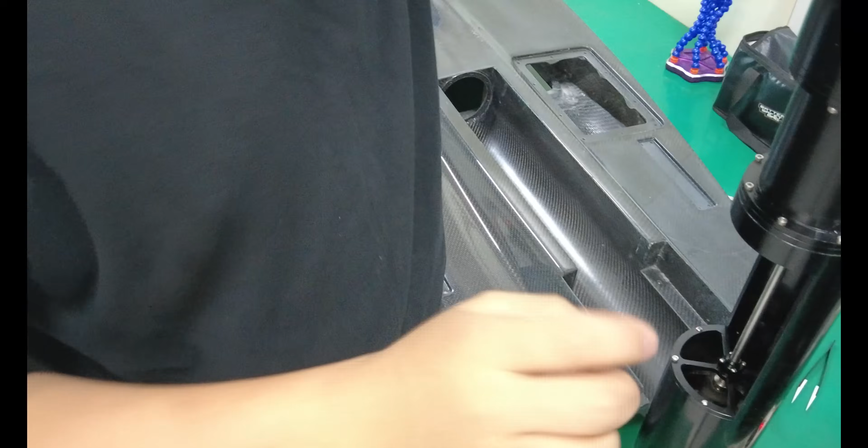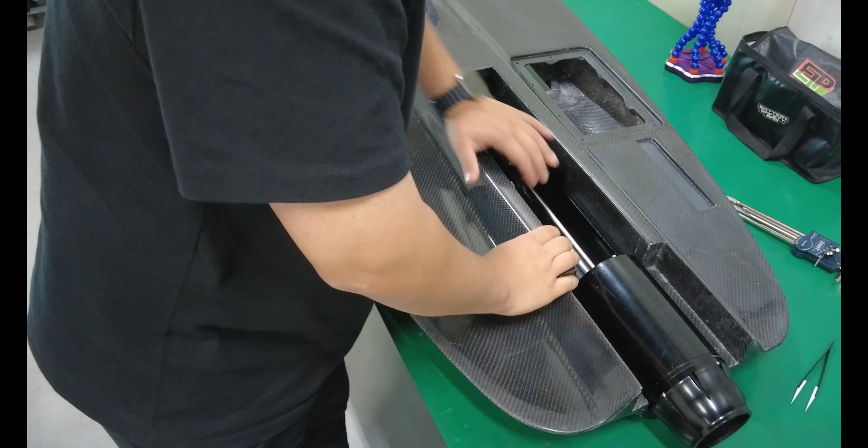This isn't just another electric surfboard. While the shell was purchased, the core propulsion system was entirely designed, assembled, and installed by me. From the battery pack and Inrunner motor to the metal 3D printed screw, this system was built from scratch by hand.

Before building anything physical, I created a detailed 3D model of the drivetrain. I optimized the layout for waterproofing, vibration isolation, and thermal dissipation, and checked for cable clearance and internal spacing in CAD.

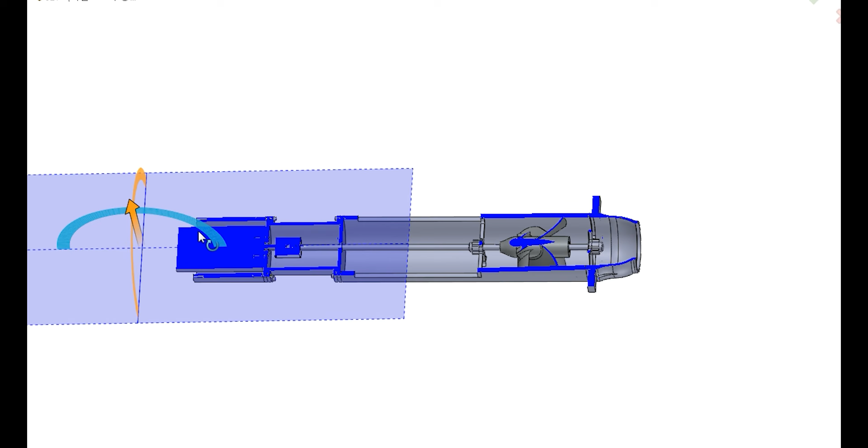The motor I used is the EZRUN 70125SD 560 kV Inrunner, capable of delivering up to 10 kilowatts of power and over 25 Newton meters of torque. It's built for high-speed operation and sealed to survive tough aquatic environments.

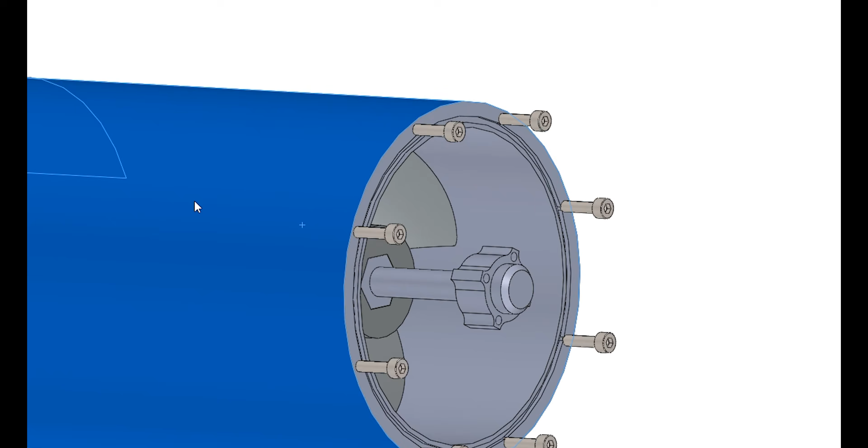The ESC is the EZRUN MAX4 HV 300A with a 300A continuous rating and up to 1870A peak. It's waterproof and equipped with full protective circuitry, making it ideal for high output marine applications.

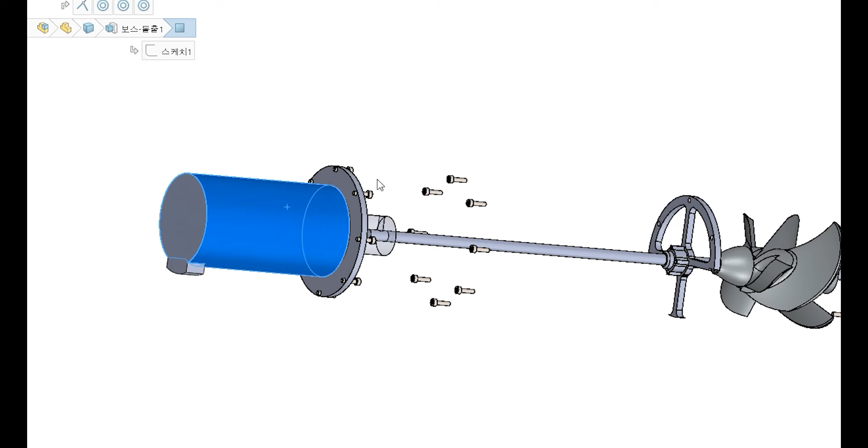To validate the propeller, I performed CFD simulations on the custom metal screw I designed. Rather than chasing maximum efficiency, I focused on strength and thrust.

So this wasn't just assembly, it was precision orchestration. Every component had to be installed, aligned, and sealed with care.

I started by applying a thin, even layer of grease to the motor shaft. In saltwater conditions, corrosion and wear happen quickly, so metal on metal contact must be properly managed from the beginning.

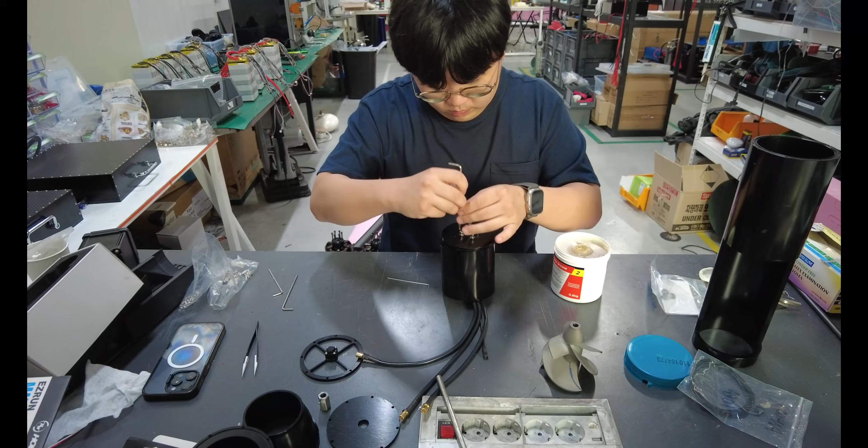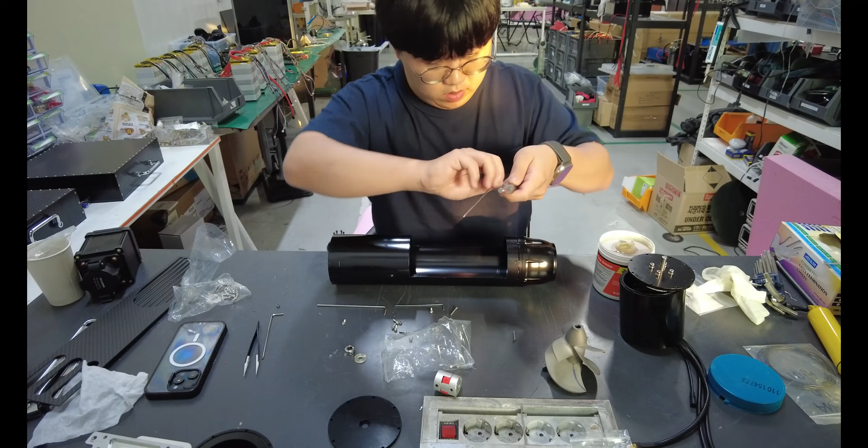Next, I mounted the 3D printed metal screw. Because of slight tolerances from the printing process, I had to fine fit the shaft coupling manually, repeatedly aligning and checking clearances. Even a slight misalignment could cause vibration at high speed, leading to performance loss or even damage.

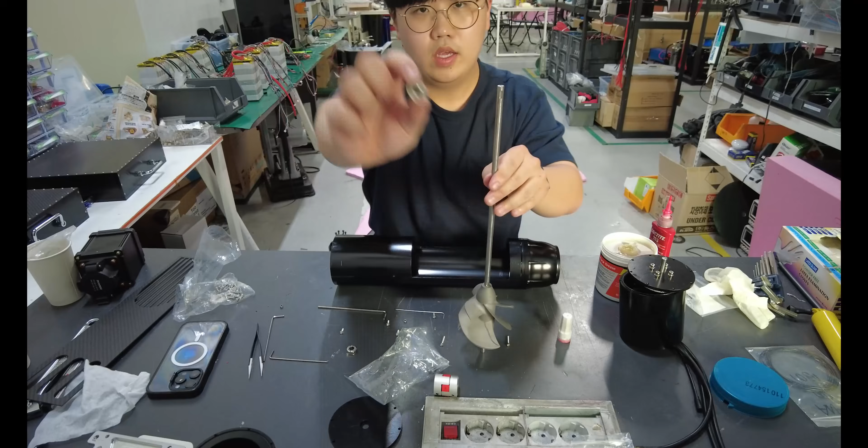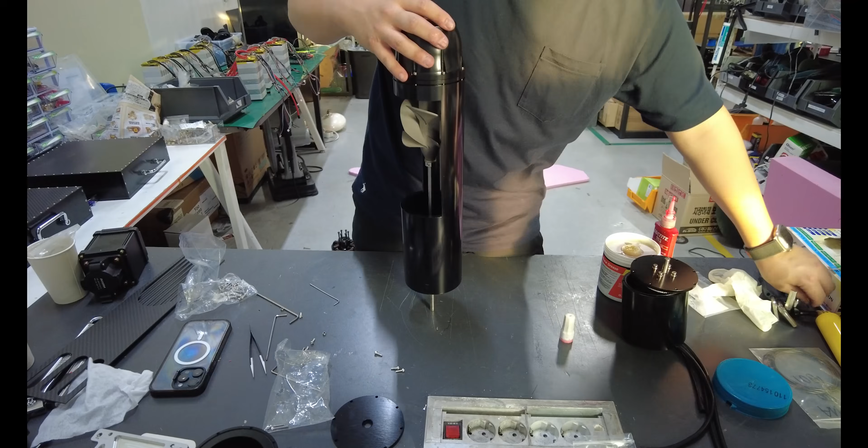Then came the motor housing. Since Inrunner motors generate a lot of heat, I used a housing with built-in cooling fins. Waterproofing was handled with gaskets and silicone O-rings. Instead of rigid mounting, I focused on achieving a balance between secure fitment and vibration absorption.

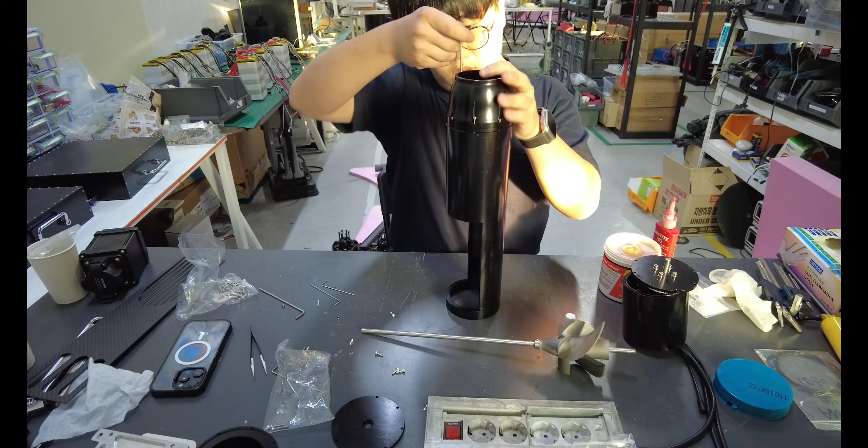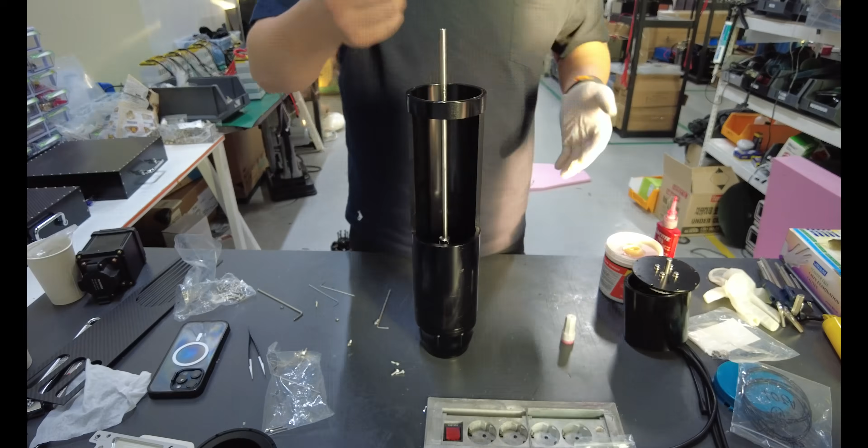With the mechanical assembly complete, I wired up the system. I connected the ESC throttle signal wires and sensor cables, making sure everything was routed neatly and physically isolated from moving parts. All connectors were sealed to keep out moisture.

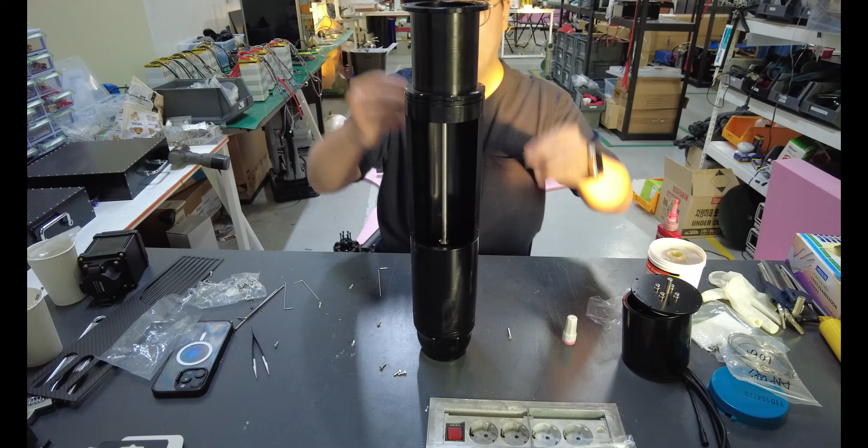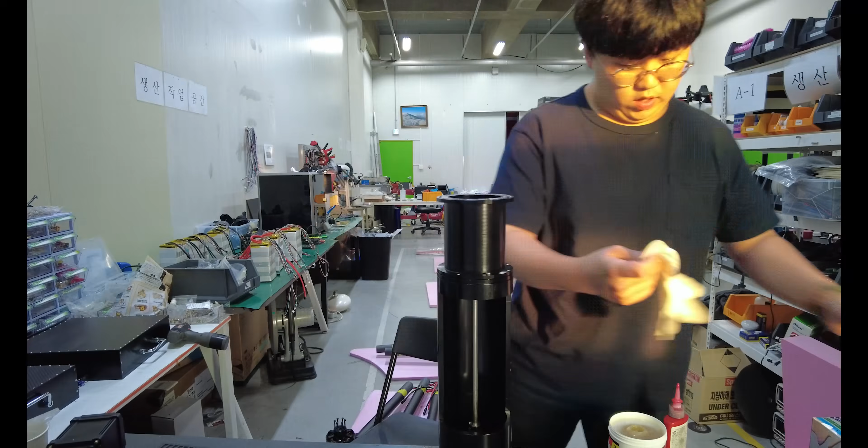The most critical waterproofing point was the coupling between the motor shaft and the main drive shaft. Since this junction rotates and sits near water, I applied a large amount of grease to this area. The grease not only reduces friction but also acts as a barrier to water. I checked the coupling pressure several times before closing it up.

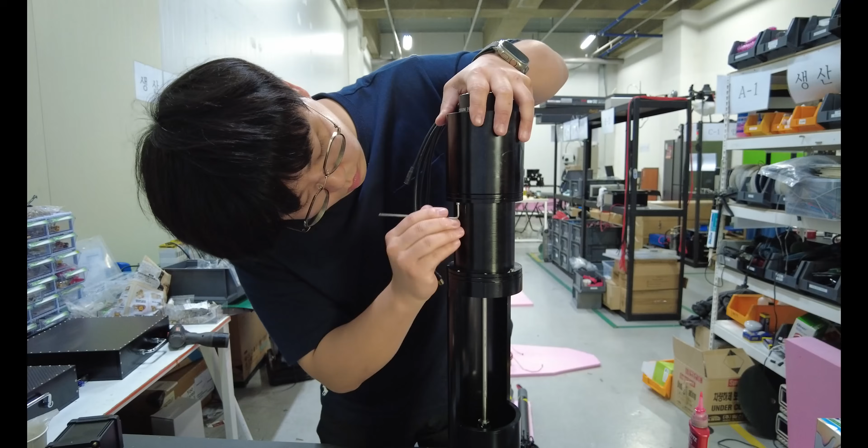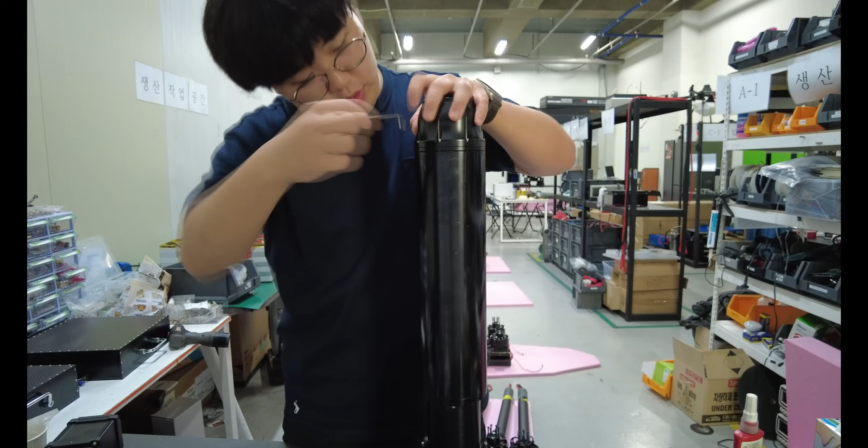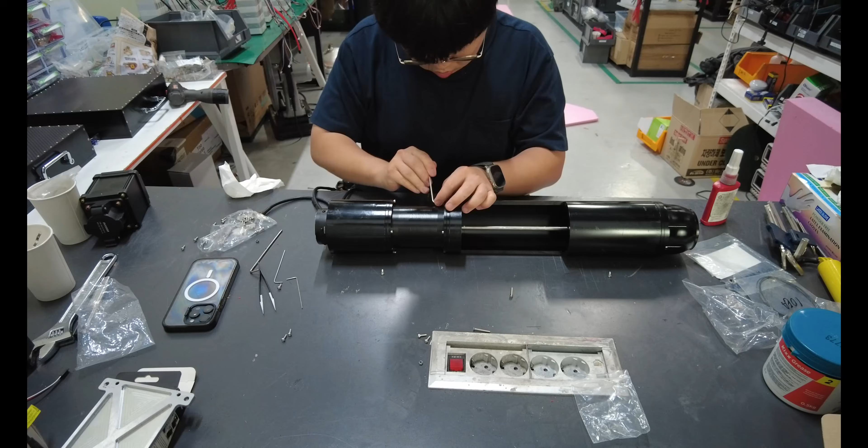Once wiring and sealing were complete, I ran a final system check. I powered on the ESC, moved the throttle slightly, and the screw began to spin. Seeing all of it come together and work exactly as intended was a satisfying moment. To me, this wasn't just assembly, it was tuning. Every part needed to move in harmony, and that took intuition, precision, and engineering.

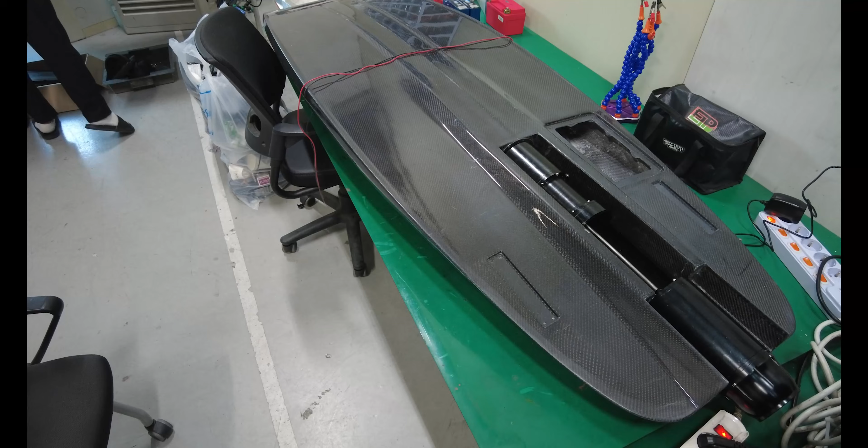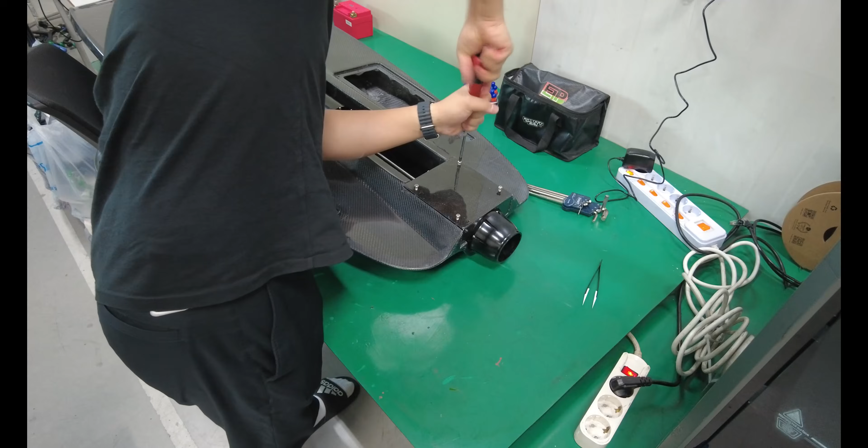After verifying that the drive system worked, I mounted it to the bottom of the board. I aligned the frame, added vibration damping spacers, and sealed everything down with screws and silicone. From the outside, it may look simple, but inside it's a dense mechanical system that I designed and built myself. And this board is no longer just a shell. It now holds a fully functional, hand-built electric drivetrain.

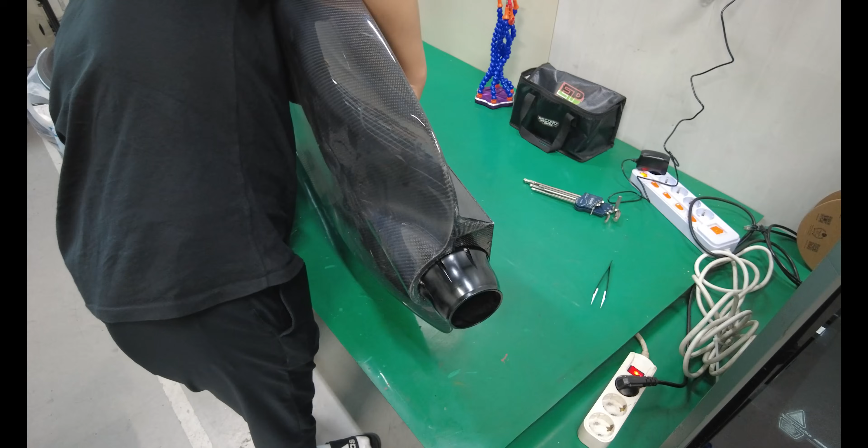In the next video, I'll design and build the battery pack that powers this board and put the entire system through real-world testing.